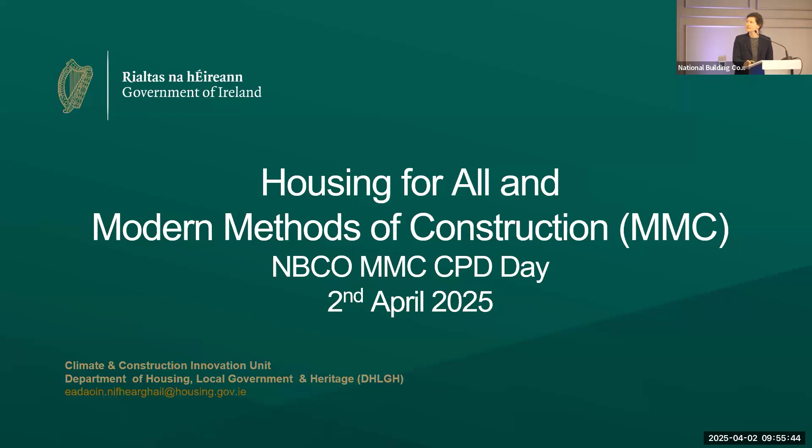I'm going to give a bit of policy context. I think many of you have actually contributed to some of these projects, so thank you. It'll be an update on where we are, and why we have adopted this three-letter term, MMC, where that comes from originally. I'll cover some of the key initiatives underway and the new programme for government, which has a dedicated section on MMC. Then I'll finish with a couple of points, similar to what Ronan and Mairead covered, on your role and some of the changes in the BCMS.

So to start, the Housing for All plan, 3.5 years in action. It's an action plan, a whole of government plan. It's important to emphasise this is led by the Department of Taoiseach and has responsibilities, actions, and ownership across many government departments and agencies, of which the Department of Housing has a number, of course.

We have new housing targets, 303,000 to deliver between 2025 and 2030. This is really ambitious. We have 6 billion capital investment this year, which is the highest level of state investment in housing in the history of the state.

MMC was identified in the original plan back in '21 as a key measure to boost productivity and reduce cost. Although the Housing for All plan is focused on housing delivery, there is a wider context of the National Development Plan and infrastructure deficit, but the housing sector is about half the value of the construction sector, and about half the labour force are working primarily in housing, and of course in other sectors.

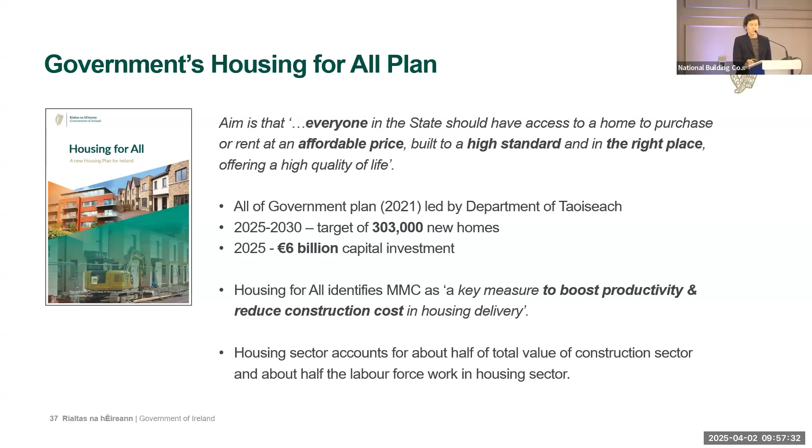I won't go through all of our governance structures, but just to say that we report to the highest level of government. There is the highest level of oversight on this work, and there is a particular focus on MMC across government.

We work closely with the Construction Sector Group, which is an industry-government forum for the delivery of infrastructure under the Department of Public Expenditure. Within the MMC framework, timber construction has been given a specific focus by the Department of Agriculture, Food and the Marine. Some of you may be involved in the working groups that have a 2-year duration, and I'll mention one of the relevant projects underway there.

You all know this, I won't go through it, but there is a lot of work being done looking at different challenges. MMC has been recognised as a way to address some of these challenges. I think the labour force is significant. We're a country currently at effectively full employment.

The Department of Further and Higher Education have done a lot of work raising awareness and promoting careers in construction, and I think we have a challenge with an ageing workforce, with working conditions on sites, and we also don't want to take people out of other important work that needs to be done beyond housing delivery.

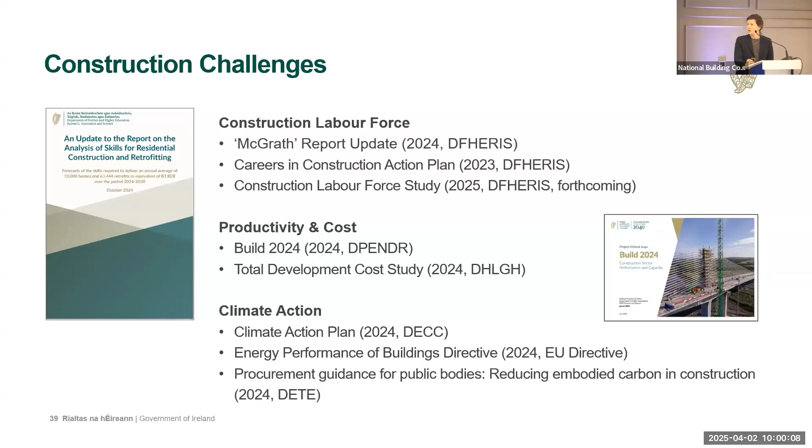So the term, you may in documents have come across some of these terms at the top. There's not a single way to describe the types of construction methods that we're talking about today.

The UK and Ireland do have a strategic cooperation. The Taoiseach and the Prime Minister met just before St. Patrick's Day. There's a UK-Ireland 2030 strategic cooperation. The term modern methods of construction was developed in the UK, and the Housing for All plan incorporated it, and we have since formally adopted it in policy.

And I think that's positive to align ourselves internationally. I think Spain is also using this term now. We do work with other European countries, we meet with our counterparts, and I think the definitions framework has been recognized as the most comprehensive description or set of definitions.

In Europe, industrialized construction is commonly used in many Eastern Nordic countries. There is a reference to industrialized construction in the housing ministers' summits, their biannual summits, and they write short reports from those meetings. There is also a housing and energy commissioner now appointed since the autumn. We're waiting to see how industrialized construction will be captured in more detail in his work.

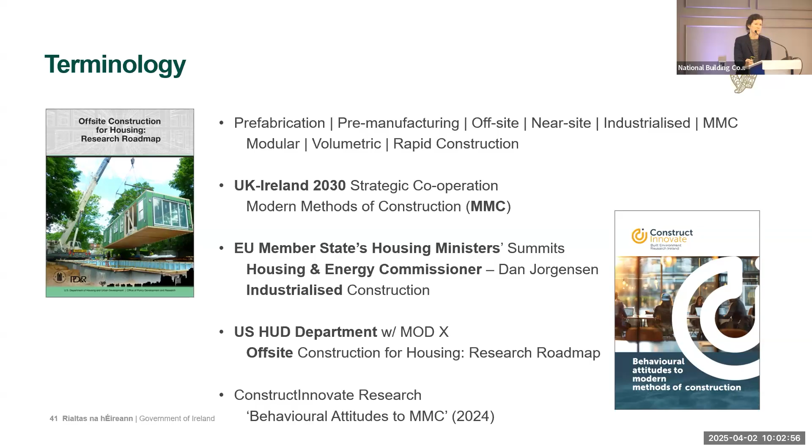There is just a piece of research there. I've included behavioural attitudes to MMC, so a survey of some of the terminology and some of the thoughts of the public on that. But generally, I think MMC is seen as a positive term. It's neutral, probably at worst. There aren't any sort of negative associations, and people do think that the quality is equivalent. So there haven't been any concerns on that.

As Ronan and Mairead set out, we published an introductory guide. It's short, it's non-technical, it's approved by government. It's focused on housing and aligns with the UK definitions framework. It includes the 7 categories, but has a bit more detail on the ones that we are seeing coming through in Irish construction. We are looking at an update to that this quarter to pick up on some of the new regulatory requirements coming from Europe, for example, including additional categories.

And just, I suppose, in the sense that housing can lead some of this work, the Department of Education has published a similar guide for their own use in the schools programme. And we do work with the Department of Education, Department of Health, and others, and some of those are ahead of us in some of the categories. I think 3D volumetric has a longer use probably in healthcare and education.

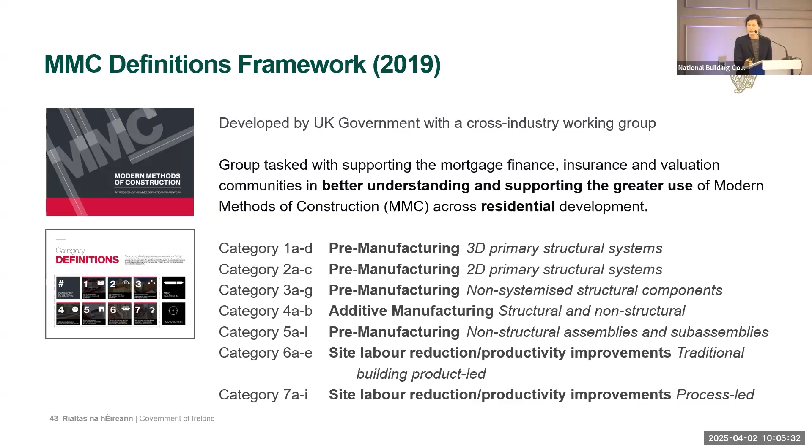And as Ronan and Mairead were saying, there's a large focus on off-site or pre-manufacturing, but there are also on-site categories - product-led and process-led. ICF, which we're seeing quite commonly used in Ireland now in housing delivery, is a process-led productivity improvement. So it's identified in category 7B, I think. I'll come on to that.

So I just thought this text was useful. This was when the UK government published their framework. Why use this term? It's to regularize and refine, create more structured data sets, a common understanding, build confidence, and develop a better evidence base. So I think we'd be aligned with that in our use.

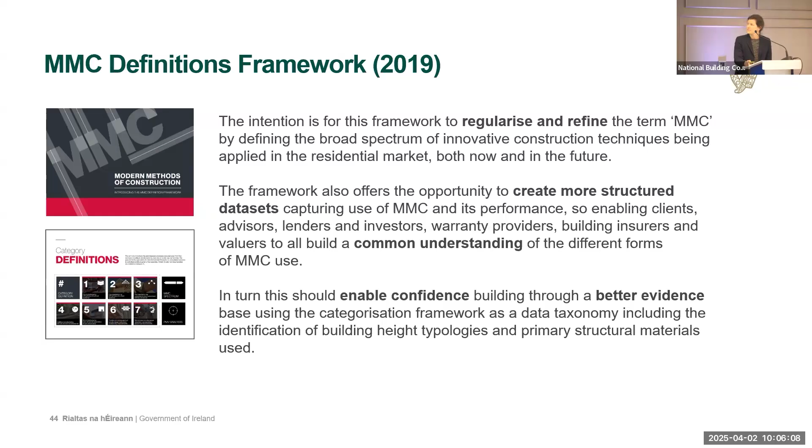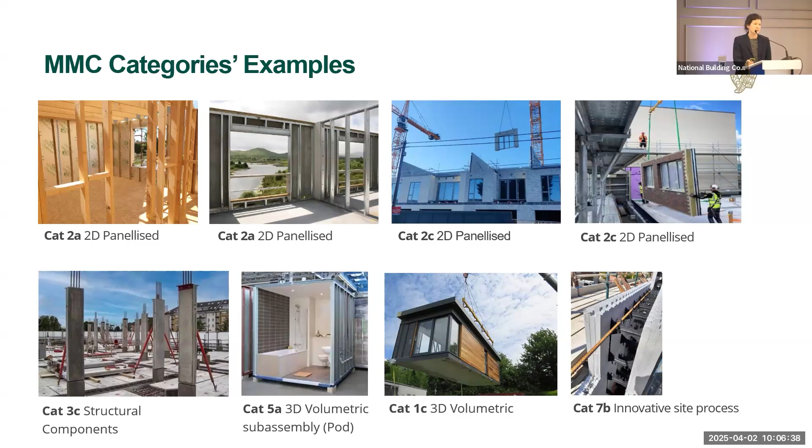Some examples. I know there's going to be a lot of technical presentations today, and I'm sure you've seen some of these types of projects, but I've just added the subcategories as well, just to show, within panelized, for example, you have different levels of completion, as Ronan was saying, and combinations. Many of the manufacturers are going to different levels of completion with external walls versus internal walls and so on.

So potential benefits - when we published our introductory guide, we called them benefits, but it's important to assess these on a project-specific basis. These are all potential benefits, but every project is different.

We have evidence to support some of these consistently. I think others will vary, but faster delivery has been a consistent benefit across our social housing delivery, both the construction programme, the time on site, and the overall development programme.

Cost should see reduction with economies of scale if you look at the manufacturing sector. We're not seeing that yet - it's on a par at the moment - but we are seeing greater cost certainty, and that makes sense when you think about the level of design freeze at an earlier stage in a project. We're seeing fewer variations on site, so greater cost certainty is coming through in the final accounts. I'll come on to that in a minute.

Different and lower labour requirements - a fixed place of work, fixed hours of work, shift work, which might suit some people, machinery to do heavy lifting. So it does give opportunity to bring different people into construction, and greater levels of digitization, which will be attractive to a certain cohort. Regional employment...

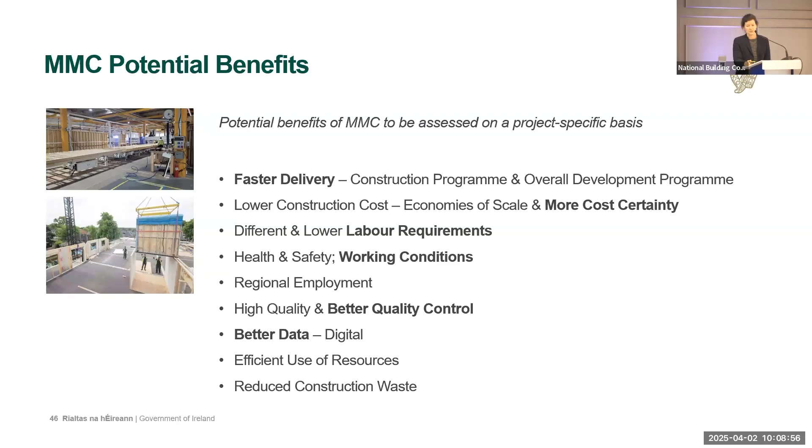So these are just some of the considerations, and I think they'll be covered in the detailed presentations later today. But something I thought was very simple but very logical: what should be done in a factory is only what can be done more efficiently in a factory. It's not MMC for MMC's sake.

We're doing it to achieve certain benefits. If something can be done better on a site, on a nice summer day, people are outdoors, so be it. I don't think all construction is going to move into a factory environment - I'm sure you all know that. But it's about looking at where efficiencies can be introduced.

And when you do have inclement weather, and delays due to curing of concrete on site - we see in certain areas, northern Sweden, I was there, and there's a logic to being in an indoor environment during the winter there. So it's just about applying the considerations to a project.

And understanding that - these will all be picked up during the day, I'm sure, and ones that have come up in our discussions. But the interfaces and the responsibilities, and ensuring that you as building control officers and assigned certifiers are aware of who has responsibility for what, and where work is being done, whether on the site or in the factory. And again, the importance of designing from an early stage for this system, considering the construction methods.

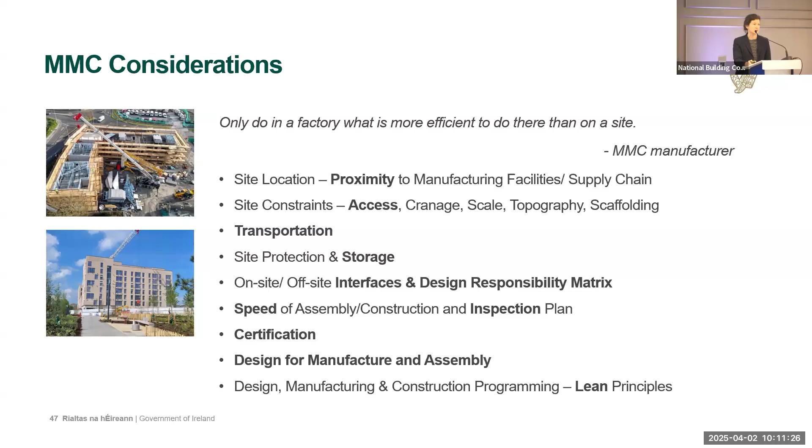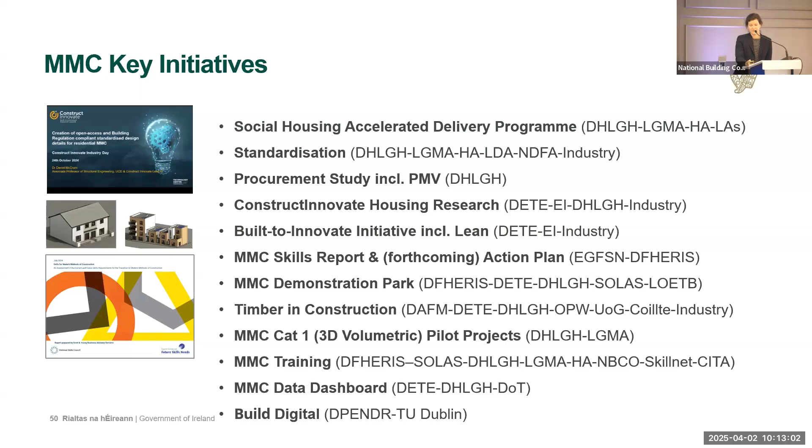Lots of acronyms there, apologies, we tend to use a lot of those in our work. Some of you will have contributed or be working on some of these projects: the Accelerated Delivery Programme, Standardisation, Procurement, Construct Innovate led by the University of Galway, the Built-to-Innovate initiative with Enterprise Ireland, Skills Report, MMC Skills, the Demonstration Park, Timber in Construction, pilot projects in Category 1, 3D volumetric, training initiatives, data, and Build Digital.

This is one of the lead projects from the roadmap. It was to build capacity in the use of the design and build contract, PW-CF2, which has seen greater use of MMC. It's a collaborative project with the Social Housing Division in the department, the Local Government Management Agency, the Housing Agency, and the local authorities who submitted projects and schemes to the programme.

So 13 local authorities have schemes in the programme, and there are 1,000 dwellings contracted so far. I think all are using one of the forms of MMC, and we should see some of those completed towards the end of this year. The Housing Agency has also provided guidance to local authority procurement teams on the use of the PW-CF2.

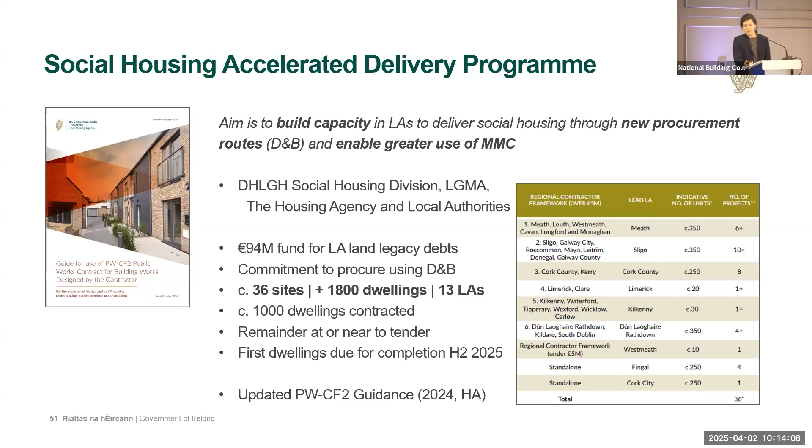What's been really valuable out of that is the establishment of regional contractor and consultant frameworks. For local authorities not actively participating in the original programme, 26 are named on those frameworks. Some local authorities have their own frameworks, and we're happy to continue with that. But the regional frameworks have values of 250 to 400 million each, to be spent over the next 4 years.

There have been regional workshops with each of the regions. I've been to one or two, and there's been really good engagement from local authorities.

To support that, there are a number of documents available: standardised design guidance, not just for those programmes but more widely for use in social housing. The Design Manual for Quality Housing, which you may have seen, was originally published in 2022 and has been updated. There are layouts for Category 1 available on the gov.ie website, and also the employer's requirements for detailed design, with an update coming shortly.

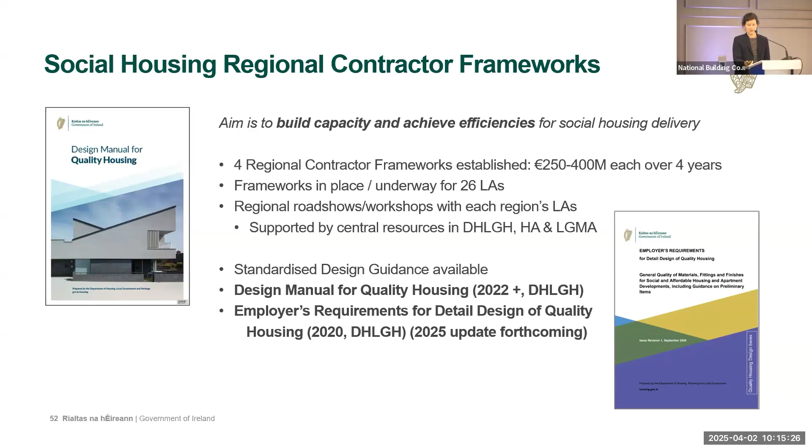So just some examples of projects being delivered using MMC, and some of the data we're gathering on the benefits: programme improvements, reduction in change orders, and greater cost certainty.

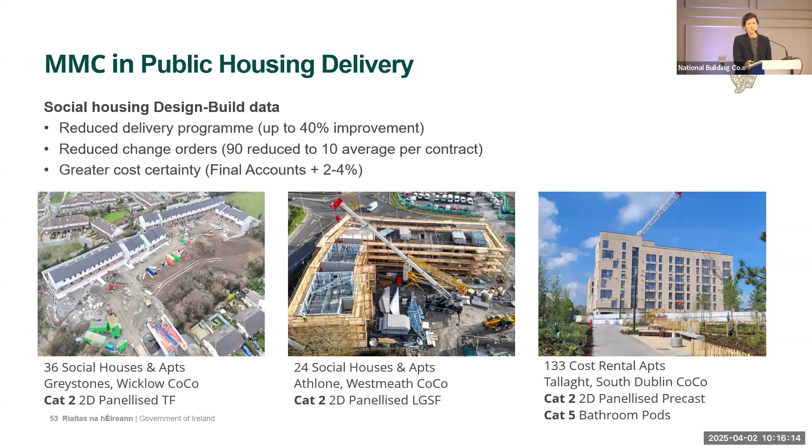From a building control perspective, those are benefits also, because you don't want to go out and see something on site that's different from the information you have. You want to know what you're going to see. Change orders are hard to account for in terms of the resource that goes into them; they should be cost neutral, but they take up a lot of people's time, so that's a real benefit.

I'll run through these quickly. We carried out a number of cost studies over the past couple of years. The first looked internationally, using 4 case study buildings from Ireland and looking internationally at opportunities to reduce cost, focused on construction cost. We identified some interesting differences with 4 European countries.

These were city regions: Berlin, Utrecht, Copenhagen, and Birmingham. The study included scope, specification, size, increased standardisation, and use of MMC, and we developed a number of actions out of that.

A standardised design approaches study, which is ongoing, and a design standard for student accommodation - one of the schemes in the cost study was a purpose-built student accommodation project requested by the Department of Further and Higher Education. We also developed a total development cost study, published last autumn. It goes without saying that a number of development costs are linked directly to construction, so if we can manage construction cost, there will be other benefits.

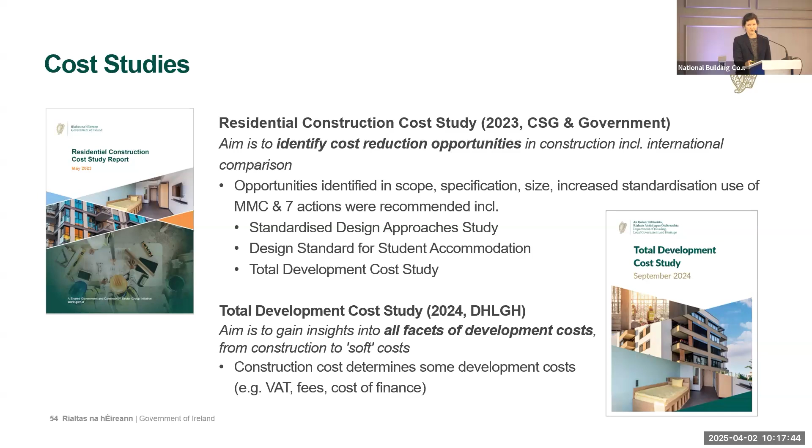One of the things that came out quite strongly in the stakeholder engagement was the opportunities presented by the publication in January 24 of the Sustainable Residential Development and Compact Settlement Guidelines, and the density ranges that allow now greater density using some of the low-rise, medium density typologies. So we have focused on that in this study.

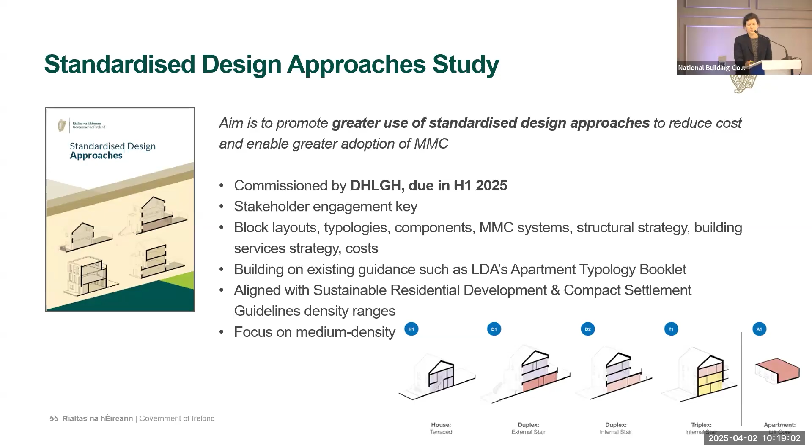I think further work could probably be looked at on the apartments as well. As I say, there's a design standard for student accommodation. Won't go through that, but it has incorporated MMC and standardization there as well.

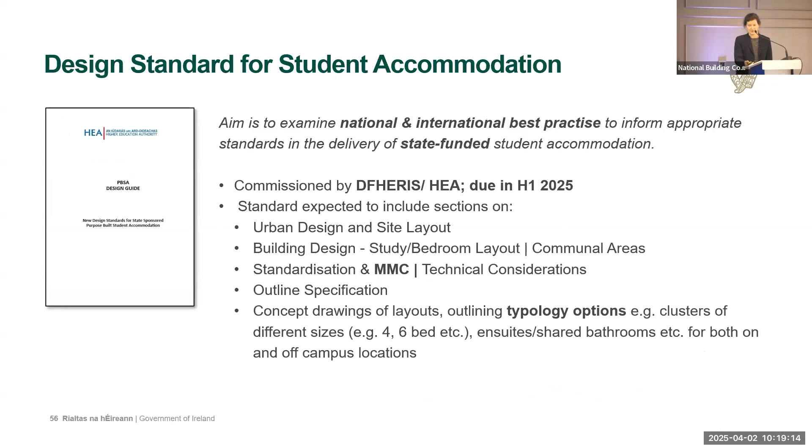There is a research project with Construct Innovate, which is one of the 6 housing research projects which were funded in September last year. It's to develop open access standardized design details to support greater adoption of MMC. And it's looking at the existing Agrément certificates and the systems that are being used in Ireland, and what is most market ready and impactful and could support greater delivery of housing.

That work is just commencing and will run for a number of years, and is being led by UCD with University of Galway.

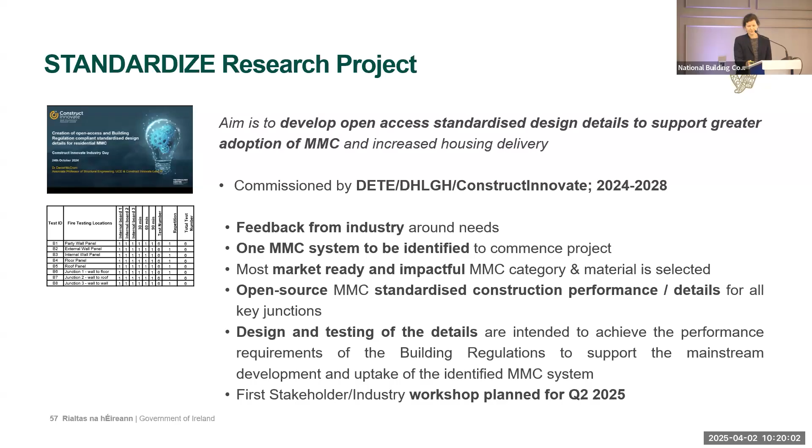The Timber in Construction group, as I say, there are 5 thematic groups. Thematic group 2, for which the Department of Housing acts as secretariat, has a mass engineered timber study. At the moment, it's due to be complete in the next couple of months. It will have recommendations for a national technical specification, and the NSAI's standards teams are involved in that work.

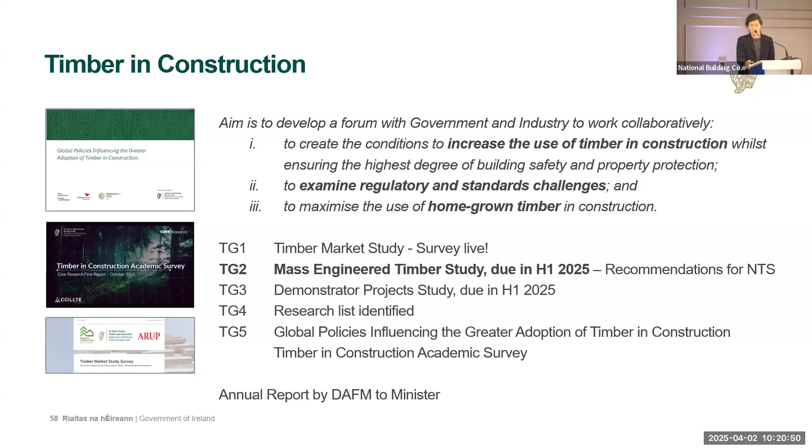But there are a number of other interesting documents coming out of those groups. Thematic group 5, those two are published, and thematic group 3 is due to publish on a number of Irish and international demonstration projects. It's due to publish in the coming months as well.

So just to wrap up, the Programme for Government has a section on MMC. Not sure if anyone has read it. There is a new MMC Innovation Fund, leveraging state capital investment and setting binding targets for MMC of 25% for all state-backed housing.

Resourcing the National Standards Authority of Ireland. Haven't talked too much about certification, but I know that's going to be covered in a lot of detail during the day. The use of timber, promoting the use of timber, and increasing the training provision, and again, dedicated apprenticeship, internship options for MMC.

So we'll be working over the coming months, or we already are, looking at how those can be implemented.

So just to finish, as Ronan and Mairead were setting out, there is a planned update to the BCMS. This should support building control authorities' risk assessment, providing more granularity, updating to current construction methods, materials, and aligning with the terminology that we're using in policy. There will be an ability to update as responses come in and information is available.

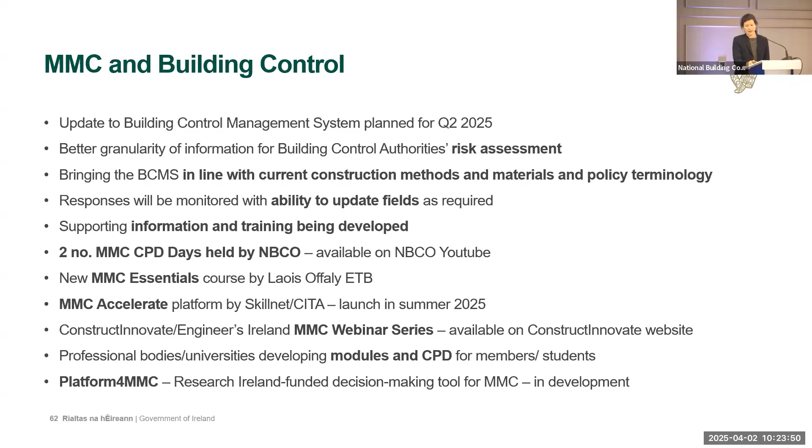The professional bodies are developing CPD. There have been a number of DFMA, Design for Manufacture and Assembly CPDs for architects by the RIAI. And there is research and different resources being put in place, a platform for MMC, to support decision making on MMC. So that's it. Thank you very much, and hope that was of use.